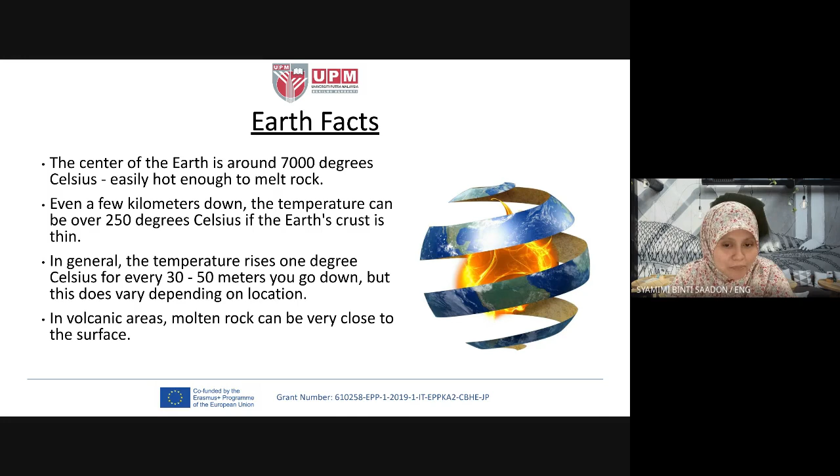So this is our Earth, which I mentioned just now; I think we have learned it since primary school. We have our atmosphere here, where we live, but inside the earth we have the mantle, outer core, inner core. So the center of the earth could reach around 7,000 degrees Celsius.

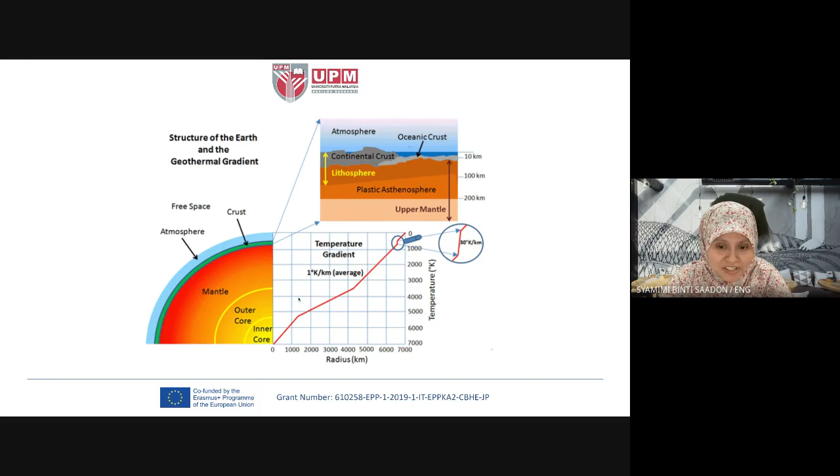Next, about geothermal energy: basically it's the heat generated from the earth's core, the mantle, the magma, the center part of the earth. It has been used for thousands of years in some countries for cooking and heating, a simple application as a source of heat for households. So it is simply power derived from the earth's internal heat. That internal thermal energy is the source of this renewable geothermal energy. This thermal energy is contained in the rock and fluids beneath the earth's crust.

So several miles below the surface we have this magma, and these underground reservoirs of steam and hot water can be tapped to generate electricity. So it has potential. Once we have a source of heat, there is a source of energy, so there is a possibility to convert this heat to generate electricity, to generate power, to heat and cool buildings directly.

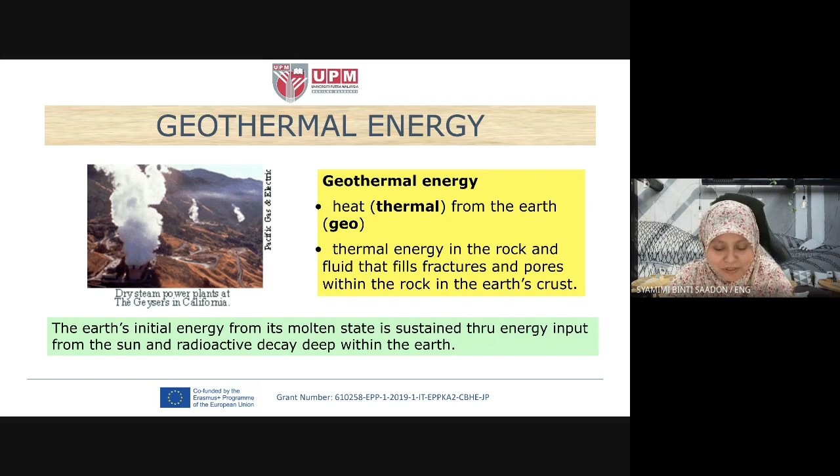Okay, still the master of all the heat is the sun. So this heat from the sun is sustained in our earth, and it develops this heat, this thermal energy from the earth. Okay, some of the geothermal resources, hydrothermal systems.

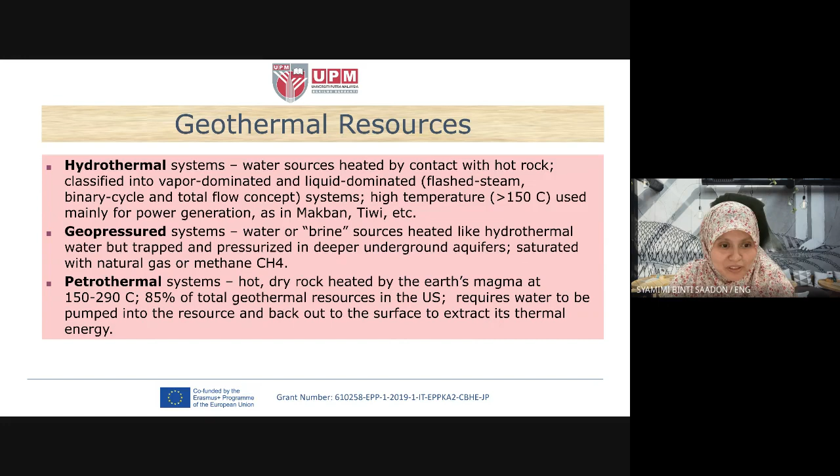This is some example. I think we skip this one first. Okay, I explain the other example first. Okay, geothermal electricity. So this geothermal electricity means that it is electricity generated from geothermal energy. Okay, so as I mentioned just now, we can use this geothermal heat source to produce electricity, to produce power.

Okay, so the heat continuously flowing from the core of the earth is estimated to be equivalent to 42,000 gigawatts. Okay, so if we apply this geothermal energy properly, geothermal could become a material contributor to global electricity generation. Okay.

Geothermal electricity generation is done by drilling wells, okay, macam telaga ke dalam tu kan, bawah tanah, to bring to the surface this superheated fluids or steam to drive turbine. So basically, how does this geothermal work?

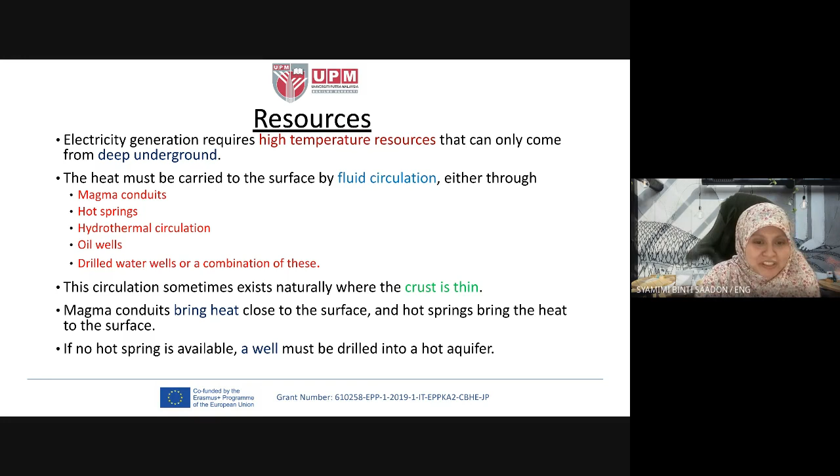So basically, the basic process mechanism of geothermal is still like any other basic thermodynamic process. Okay, most of you are from mechanical background, right? You mentioned to me in the first week. So basically, you know the thermodynamic cycle, the mechanical process behind any engine cycle. Okay, so we start.

So the first one, of course, we have the hot water from the underground, which has to be pumped through a well under high pressure. So this is one example: if we dig a well, like a tunnel downward, to drill and to pump the hot water from the underground. Okay, so it needs a high pressure to pump the hot water from the ground to the surface.

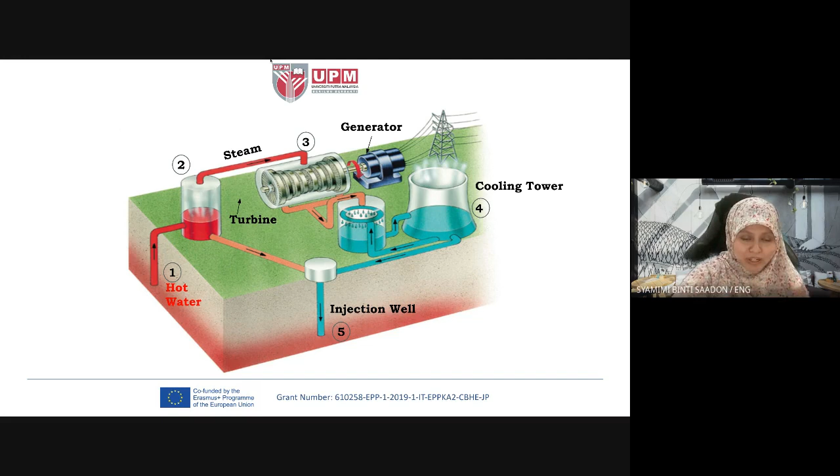The steam at hot temperature has internal energy, which is thermal energy, heat. So that thermal energy of the fluid is being converted to mechanical energy to rotate the turbine. So basically the process is an energy conversion process. We know from the first law that energy cannot be created and cannot be destroyed—energy can only be converted. So that is what happens in this thermodynamic cycle as well; we convert energy from one form to another.

So that is what it means: the steam, once at higher temperature, the fluid at higher temperature—we can imagine the speed of the molecules is higher. That kinetic energy of the gas, of the steam, is converted to mechanical power to rotate the turbine. Kinetic to mechanical power, mechanical energy.

Then the steam cools off in the cooling tower and condenses back to water. It's being cooled, exchanging heat in another heat exchanger, the cooling tower, through the condensation process. The cooling tower should have a lower temperature than the steam, the working fluid from the underground. Condensation occurs here, exchanging heat with the cooling tower, and the steam condenses back and becomes water again. The cool water is then pumped back into the earth, underground, and the process continues.

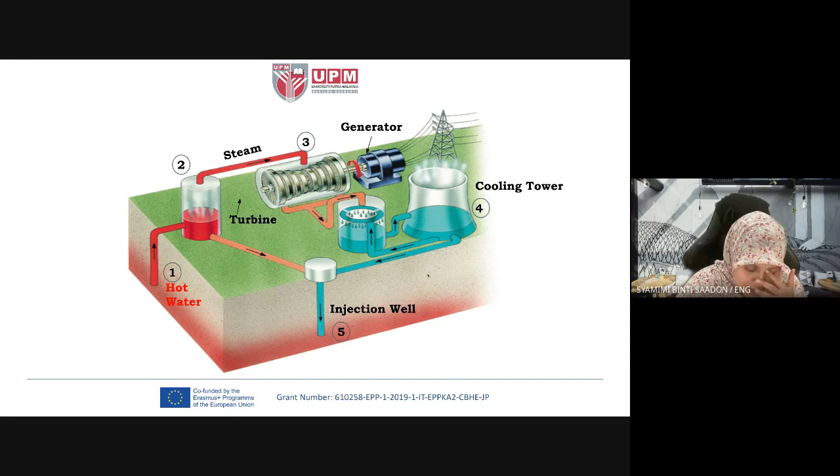So lastly, after condensation, the water is pumped and injected again into the well underground. So that is basically the process mechanism of geothermal, with only four main processes and components: pump or compressor, steam evaporator or boiler, turbine expansion, and condensation.

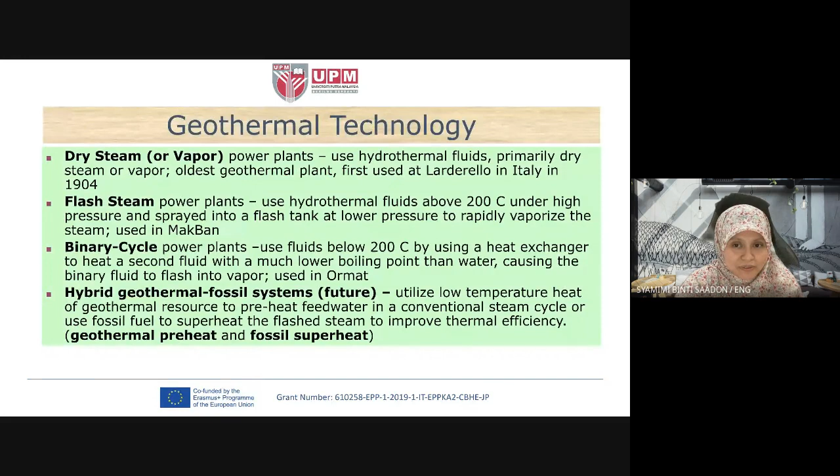So there exist four types of geothermal technology—actually three, as the last one is a future concept, future technology. The first one is dry steam, called dry steam power plants. This is the oldest, simplest, and first design of geothermal technology.

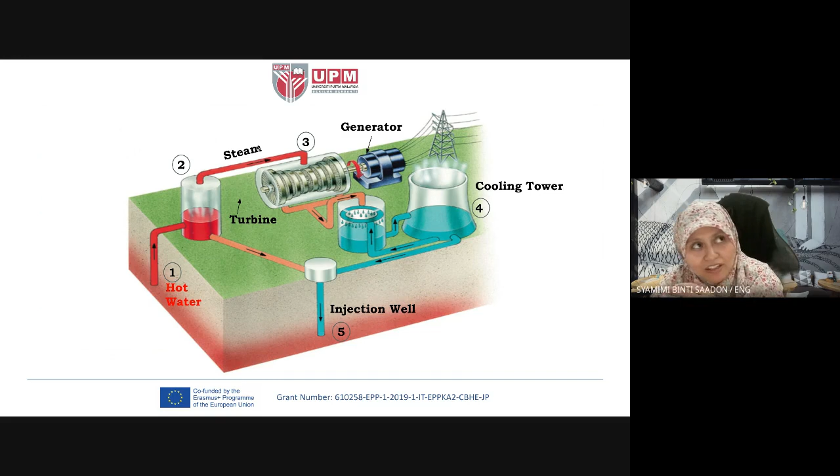It needs geothermal steam, the source of heat from underground, around 150 degrees Celsius or greater, to spin the turbine. So this means that looking back at the process, this steam, in the process from 2 to 3, has to reach a temperature of at least around 150 degrees Celsius or higher.

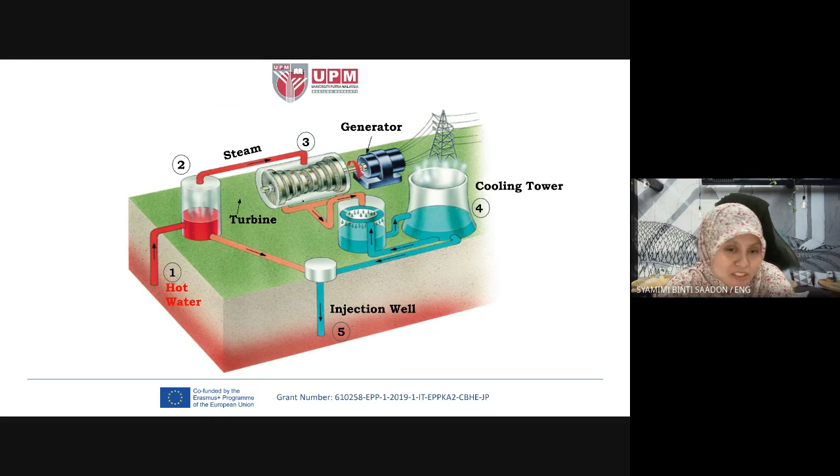Okay, so it has enough kinetic energy, enough heat, to move, to spin, to rotate the turbine and to produce power, of course.

The dry steam technology allows for the steam from a geothermal production well to be fed directly to a steam turbine, without a secondary heat exchanger.

So actually, for this first technology, it doesn't use any evaporator or boiler. It directs directly from the well, from the underground, the hot water, the steam being pumped and injected directly to the turbine.

So there's still, the steam still has to achieve the temperature just now around 150 degrees before it has enough energy to move the turbine, to spin the turbine.

But for this first technology, dry steam or vapor, it doesn't use an extra heat exchanger, which is evaporator just now, to evaporate the hot water to steam. So this one goes directly to the turbine, from the pump directly to the turbine.

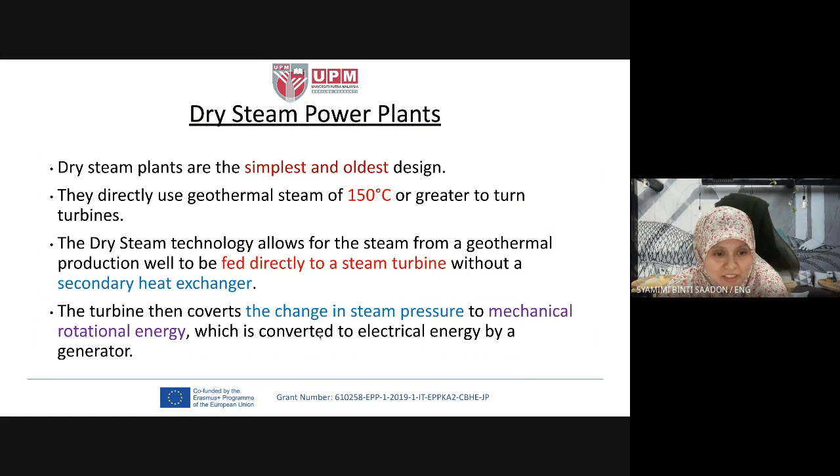The turbine then converts the change in steam pressure to mechanical rotational energy, which is converted to electrical energy by a generator. So this is the same process - the turbine produces mechanical rotational energy.

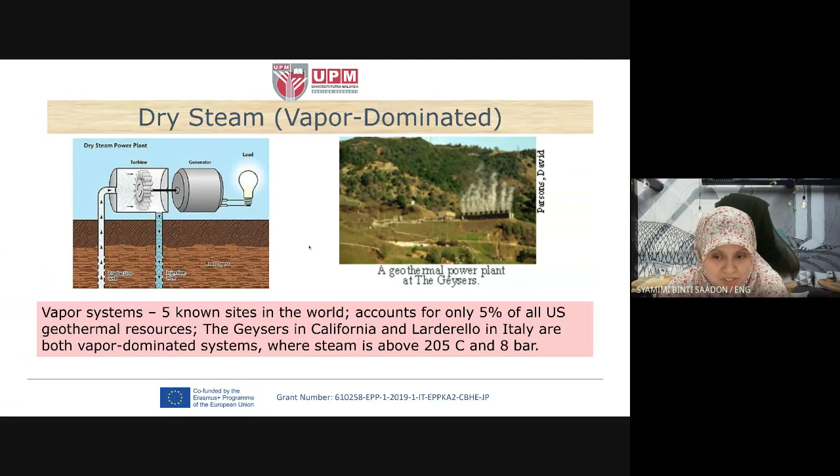And then this is the same graphic for the dry steam power plant. So here it doesn't have exactly the evaporator or boiler. Directly the steam - the dry steam - because the steam is already what we call dry, meaning it is already superheated, like a superheated fluid.

So it doesn't need an evaporation process. It can be directly, the temperature is enough to be directly injected to the turbine.

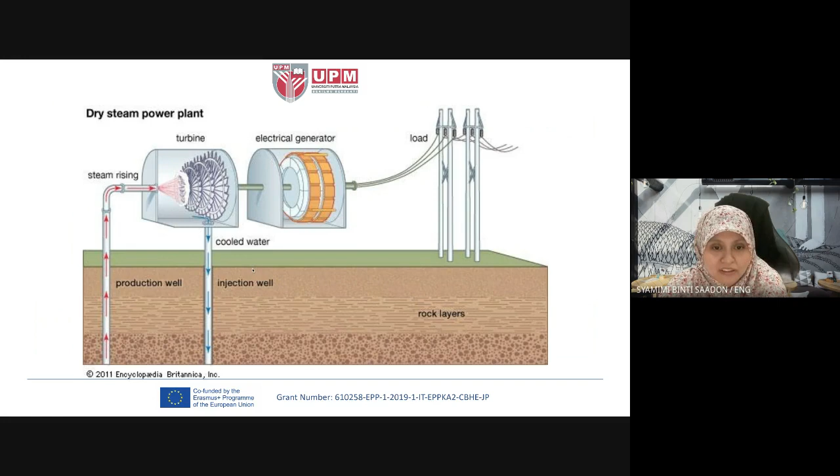So the water from the underground needs to first be boiled. Remember here the notation or concept that we use - for water it is always boiling, a boiler. Water, we say the fluid is being boiled, the boiling point.

But if the fluid is gas or steam, usually we use evaporator. The process is still the same, to increase the pressure and temperature of the fluid, the evaporation process, but the components are different. For water we use boiler, and for gas or steam, vapor, we use evaporator - the heat exchanger.

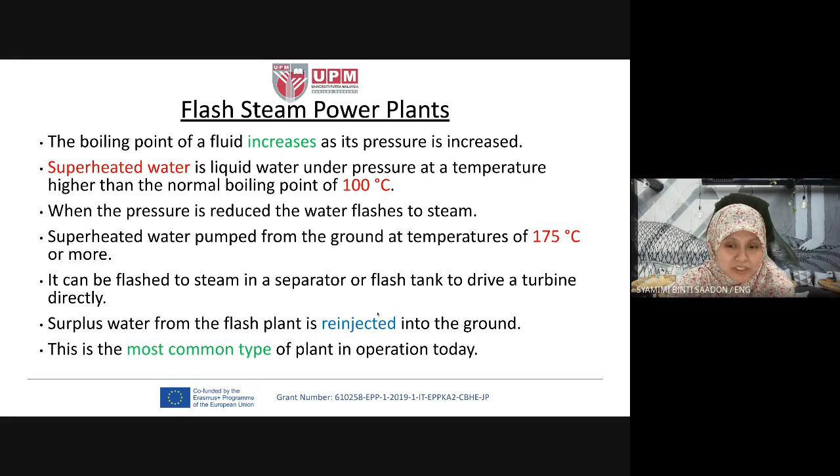So basically it is liquid dominated. Just now the dry steam was vapor. This one is liquid.

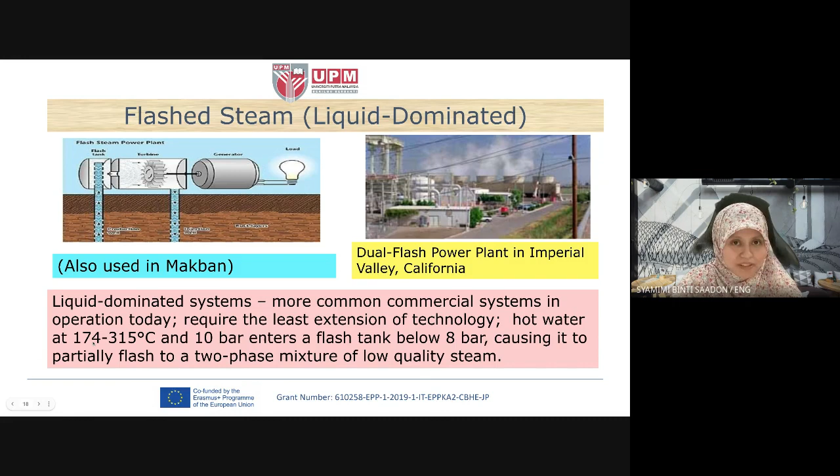So this is a liquid dominated system, the more common commercial system in operation today. It requires the least extension of technology. The hot water temperature is around 174 to 315 degrees Celsius and around 10 bar.

Okay, now the figures to explain the process used in this flash liquid or flash steam power plant. So we have a flash tank here, so it's actually like a heat exchanger.

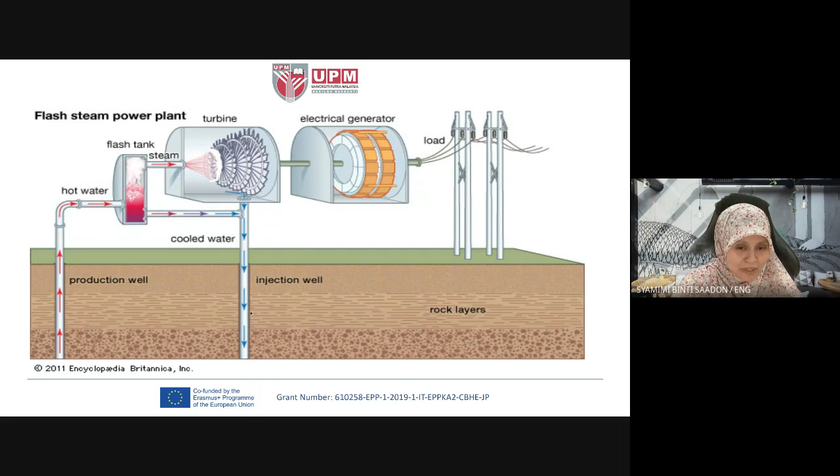The hot water from the well, from underground, is being pumped to this tank, and the higher temperature of the water becomes steam here. So this higher temperature steam will rotate, will spin the turbine, due to the kinetic energy. But the part that is not too hot, the extra, will be cooled down like condensation, and will be injected back into the underground well. So that is a flash steam power plant.

And then the third one, we have binary cycle power plants or combined cycle power plants. Binary means two, combined two. Cycle power plants are the most recent development and can accept fluid temperature as low as 57 degrees Celsius. So usually the more recent technology or development can be used for heat sources with lower temperature. So it is an advantage.

It is an advantage when we have a power plant cycle technology that can produce power from low heat. Let me explain in simple terms: usually a technology needs a high temperature before it can convert to power or electricity. Usually that's how it is. The working fluid, the steam, must be at a certain minimum high temperature before it can spin the turbine, meaning it has enough kinetic energy.

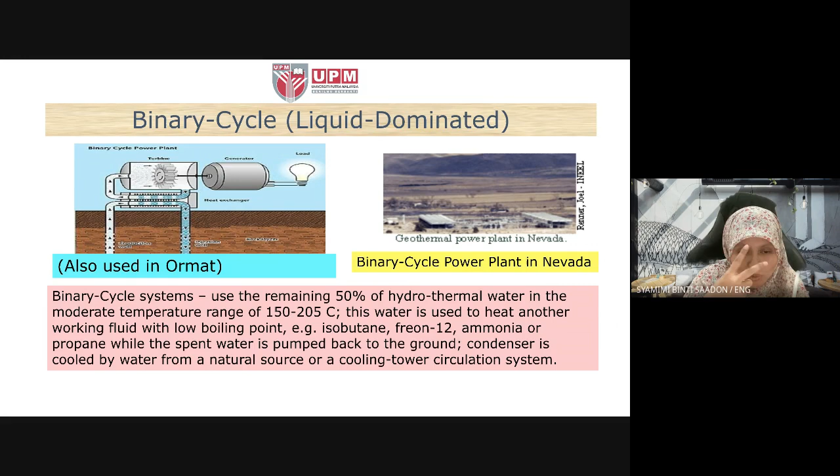So if the difference of the temperature gradient in the heat exchanger is higher, it means that extra heat is needed to boil, to evaporate. But if the temperature gradient between those two fluids within the heat exchanger is less, different dia lagi kecil, means that less heat is needed untuk evaporate tu.

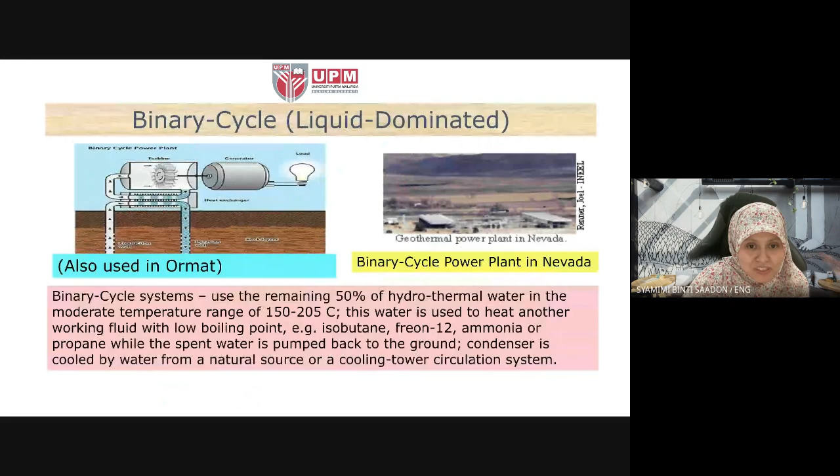Okay, because if you remember the general definition for efficiency, the ratio of what is being produced to what is being given as input. So the input tu yang datang daripada heat exchanger ni, proses tu.

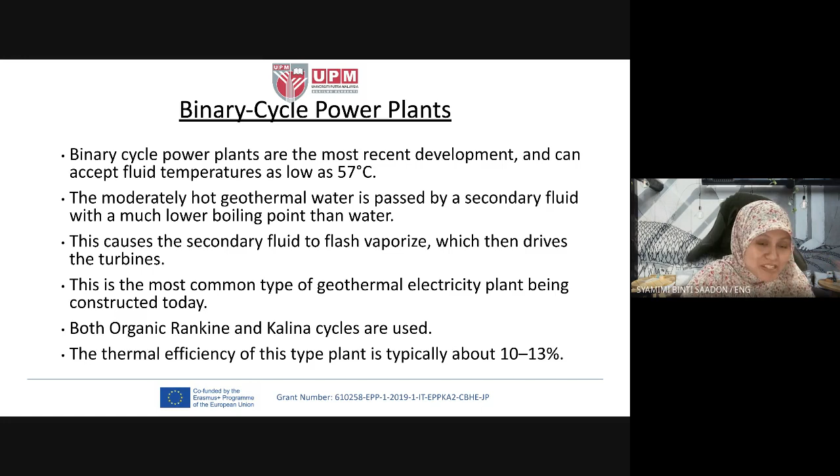Okay, so this binary again, binary cycle power plant.

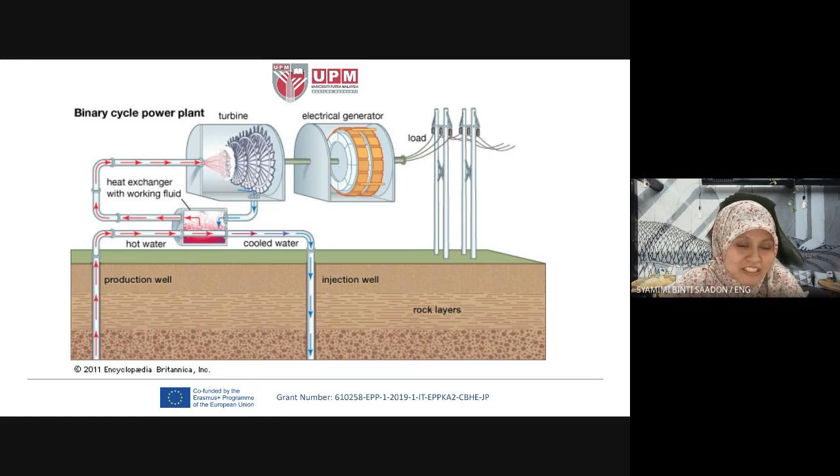Okay, and I think this is the fourth one and the last example of technology for geothermal. Enhanced geothermal system: in ground that is hot but dry or where water pressure is inadequate, injected fluid can stimulate production. Okay, kita tengok. So this one is still in current development. This approach is called hot dry rock geothermal energy.

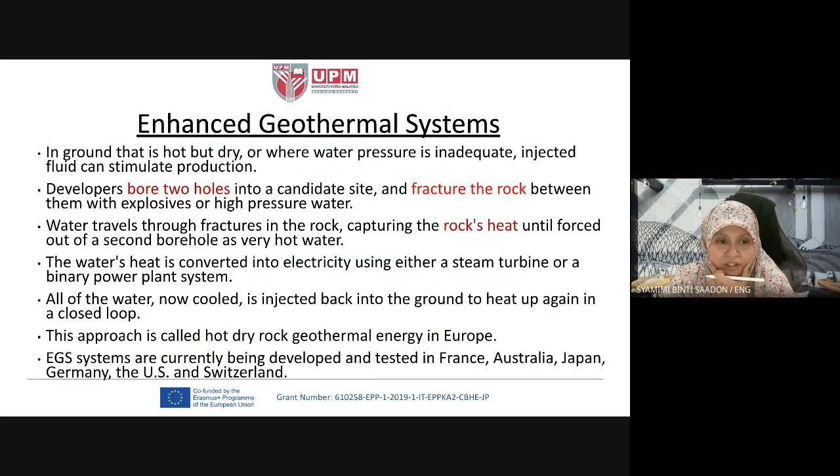Developers bore 2 holes into a candidate site and fracture the rock between them with explosives or high pressure water. So water travels through fractures in the rock, capturing the rock's heat until forced out of a second borehole as very hot water. The water's heat is converted into electricity using either a steam turbine or a binary power plant system. So in the end it's the same as the earlier one, just that it uses fracture, like there's rock down here.

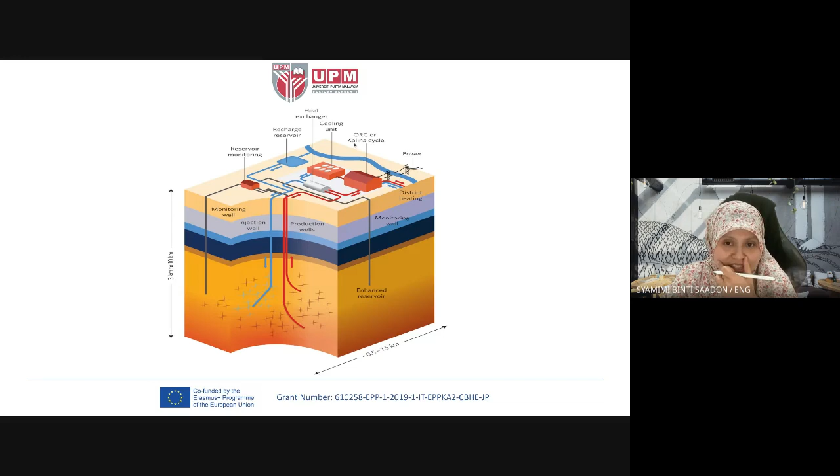Okay. So this one is still currently being developed, and it's used also with a secondary binary cycle, which is ORC or Kalina cycle. Okay, so this future geothermal technology, hybrid geothermal fossil fuel system, utilizes the low temperature heat of a geothermal source in the low end of a conventional cycle and the high temperature heat.

Okay, so geothermal, the concept is like the regenerator in a cycle. Remember, it means that it uses the extra heat from the high temperature level or source and uses it to preheat the lower temperature source. So geothermal preheat uses geothermal heat to preheat to its saturation point the feed water of a conventional fossil fuel plant. No steam is bled from the LP turbine to preheat the water, thus increasing power output.

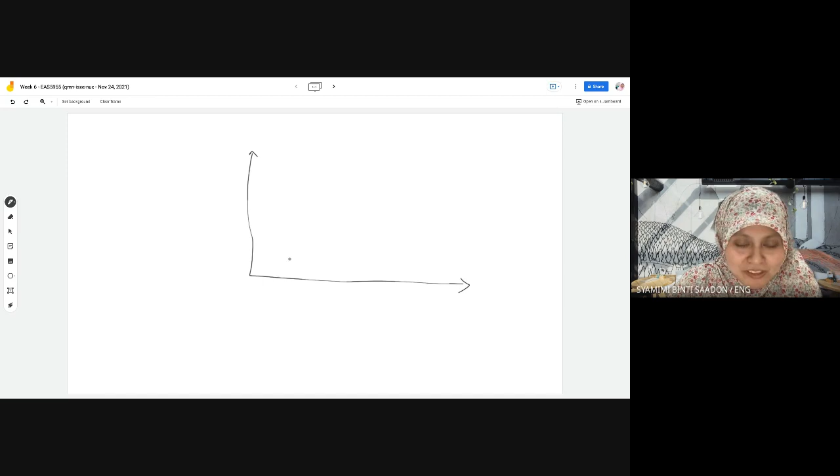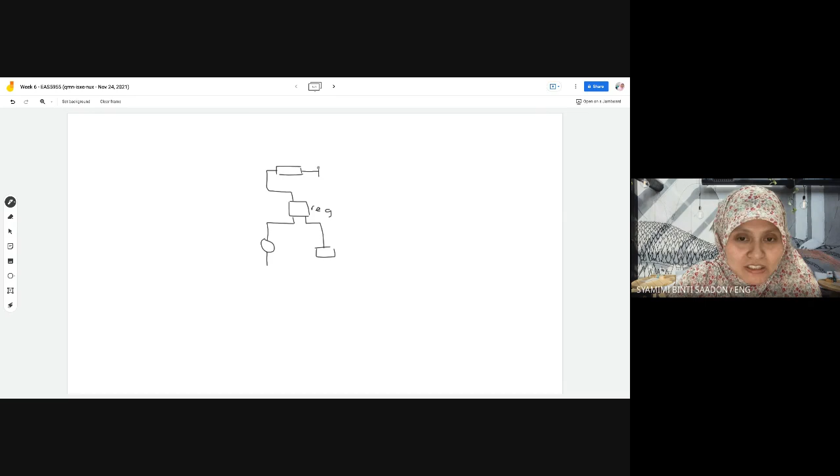So this is the pump. Then here we have a regenerator. And then here the condenser. This is the regenerator. And then this one is the same basic evaporator. And then we have a turbine. Right? Okay, this part is the basic. I just want to show this regenerator. Okay, this is the evaporator, this is the condenser, this is the pump.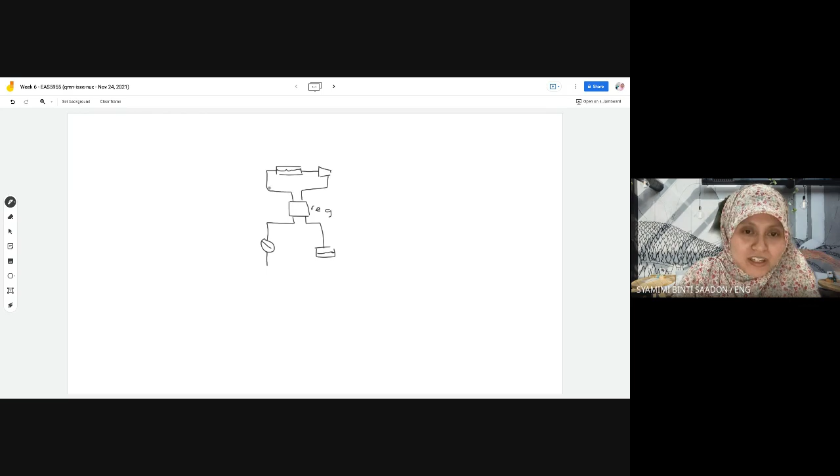So regenerator, we use the heat from the higher temperature stage to preheat the fluid from the lower side, the colder side here, because usually the pump and condenser side has lower temperature and lower pressure. This side is a higher temperature level.

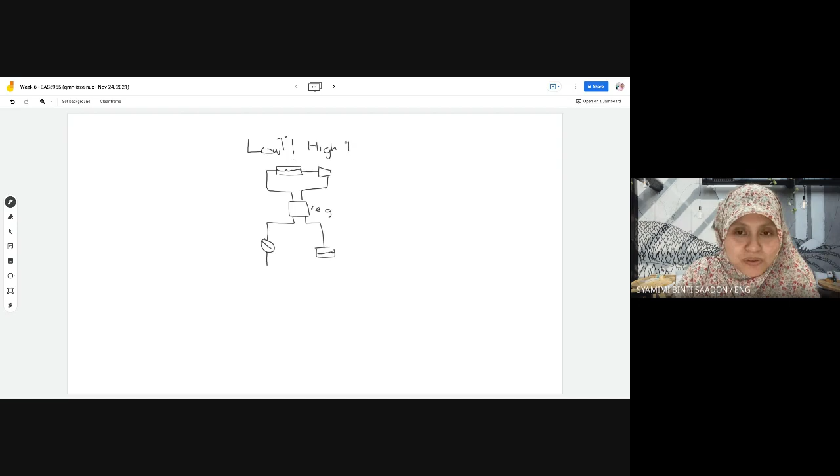Okay, so basically the idea is to minimize the heat source or the fuel, so we use this regeneration concept. It means that we regenerate the heat from the higher temperature source, the same fluid, just that we regenerate the heat to preheat the colder, lower temperature part. That's why there's regeneration here. Otherwise there'd be nothing here. So the concept is roughly like the regenerator. Okay, geothermal preheat, to preheat.

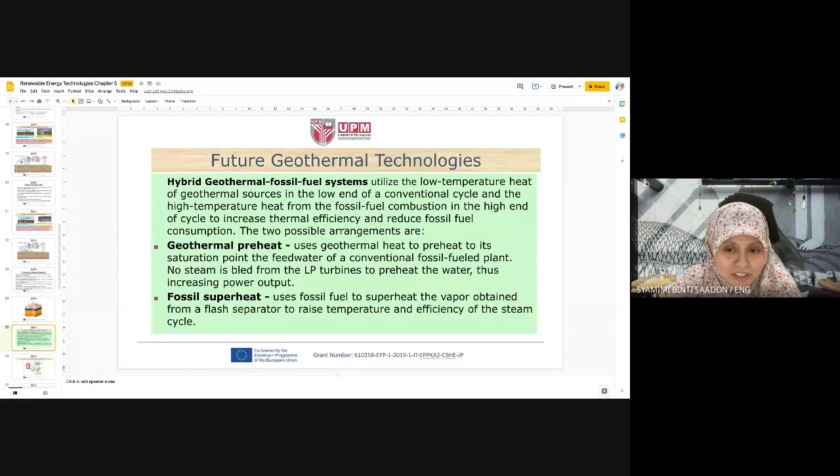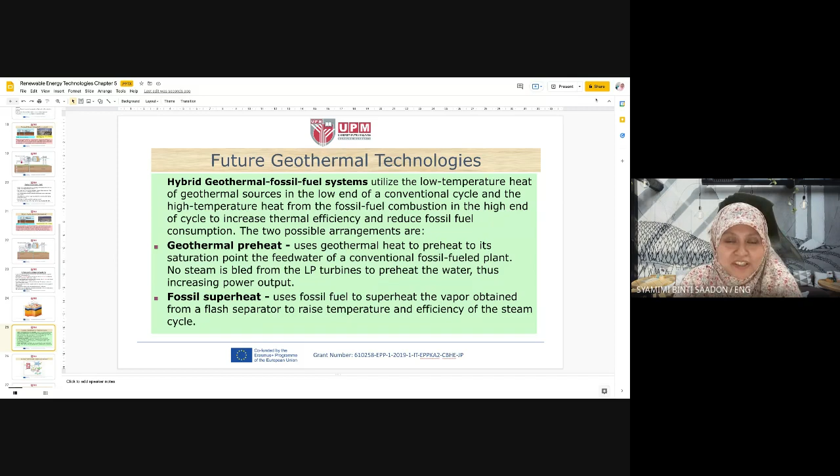And then fossil superheat, another one is the use of fossil fuel to superheat the vapor obtained from the flash separator to raise temperature and efficiency of the steam cycle. So another one is to reheat to increase the temperature of the vapor. Even after evaporation, we superheat, increase the temperature more, because higher temperature means higher thermal and kinetic energy. So thus it will produce extra power in the turbine. So the concept is roughly like that.

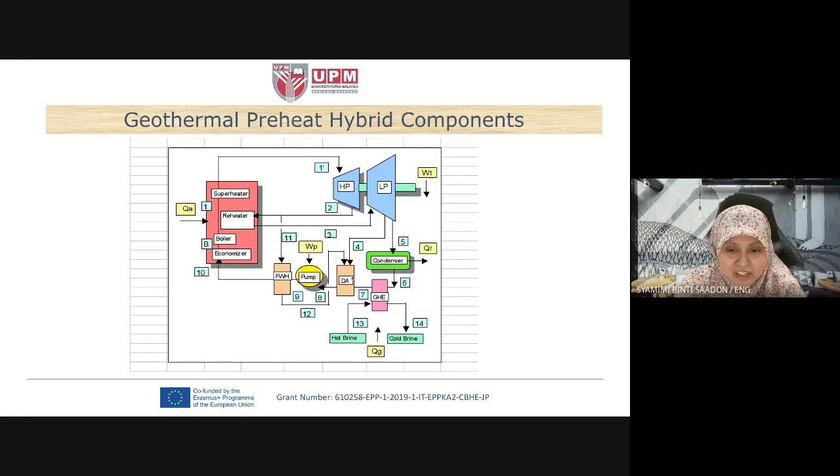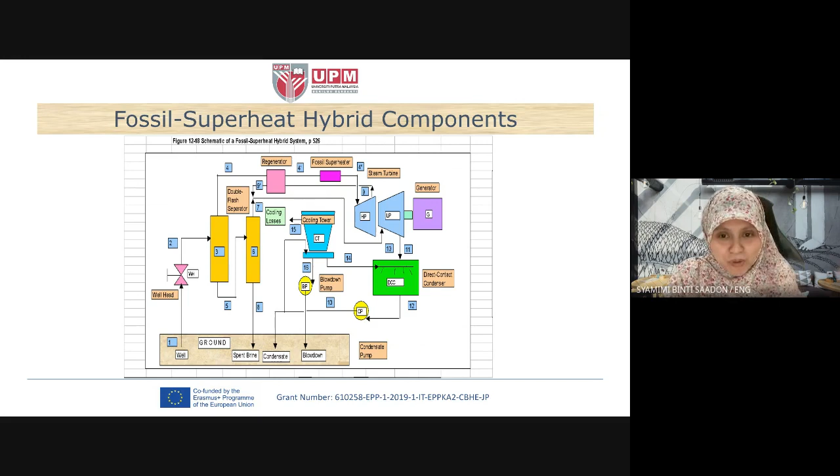Okay, so this is the diagram. It looks a bit complicated, but the main process: where's the pump? Okay, pump, there's feed water here. Feed water, pump, and then the basic one only has an evaporator, or boiler. But here with this preheat concept, it adds an extra economizer, or sometimes we call it regenerator, and an extra superheater, etc. So just extra heat exchangers, to increase efficiency, of course. And another one, fossil superheat. Of course the process becomes more complicated. Okay, enough about the technology.

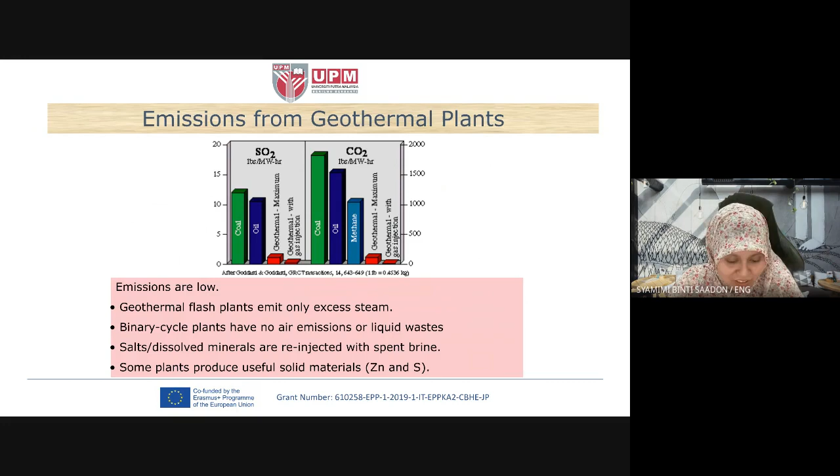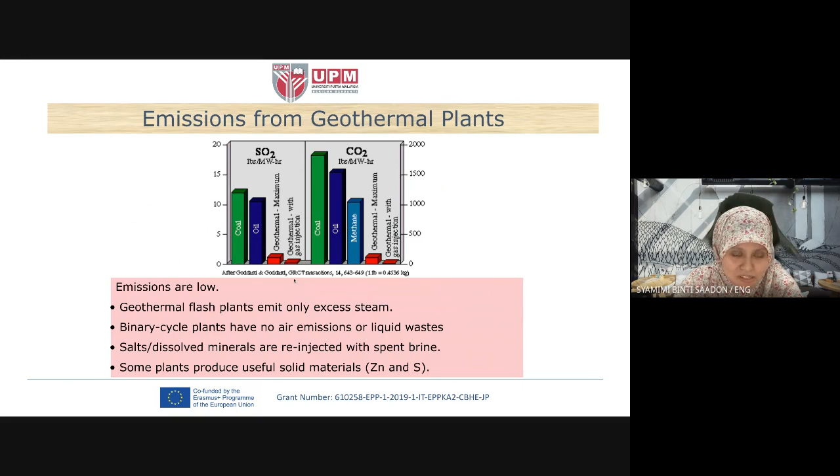Now the emissions. Compared to other renewable energy, the emissions resulting from this geothermal source are quite low. It still emits some gas, but it has less production emission of carbon dioxide or sulfur.

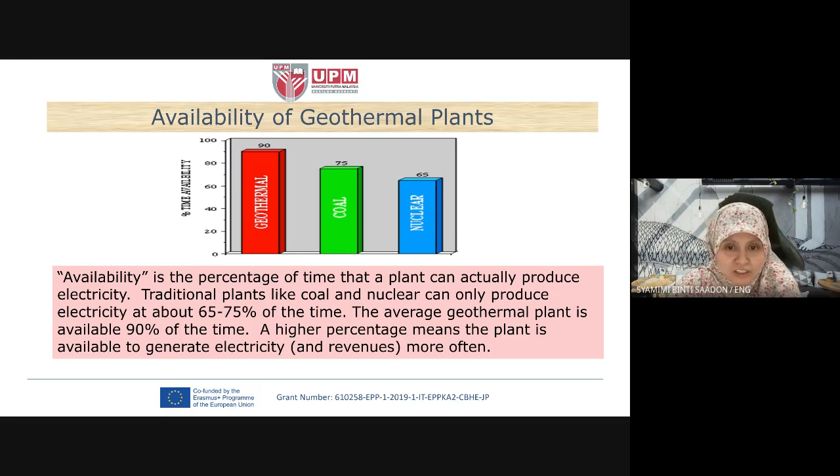But here for geothermal, availability is the percentage. Traditional plants like coal and nuclear can only produce electricity about 65 to 75% of the time. However, for a geothermal plant, the availability is around 90% of the time. A high percentage means the plant is available to generate electricity more often. So the percentage availability of geothermal is higher than conventional sources like coal, nuclear, etc. So what are some of the benefits, and later on we'll see the disadvantages of geothermal.

Sustainability: geothermal power is considered to be sustainable because the heat extraction is small compared with the earth's heat content. The earth has lots of heat content, so the geothermal power that we use is only a small portion of our earth's heat content. It is considered sustainable because the source is always there.

And then the emission intensity is low compared to other renewable energy. It is available throughout the year, unlike solar or wind energy. It's also relatively inexpensive, saving from direct use. This depends, of course, on the location and on the installation process, the cost.

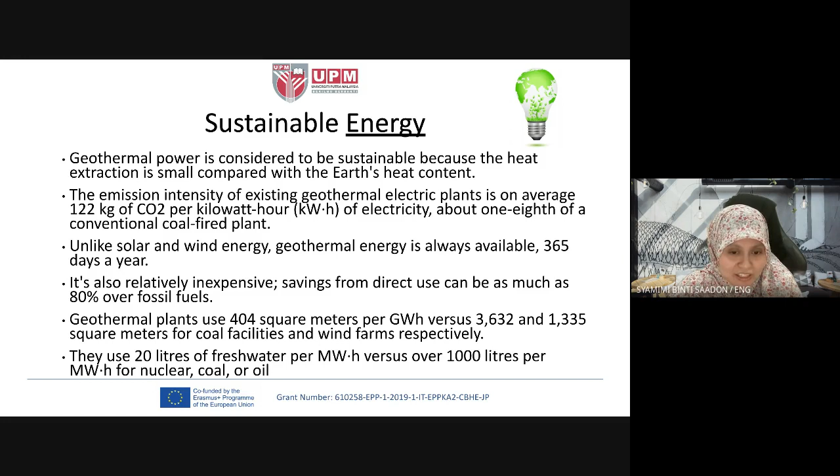Geothermal plants use 404 square meters. The area needed to install this geothermal plant is maybe less than other energy sources. Another advantage: it does not produce any pollution and does not contribute to the greenhouse effect. It does not take up much room, and no fuel is needed. Okay, sorry.

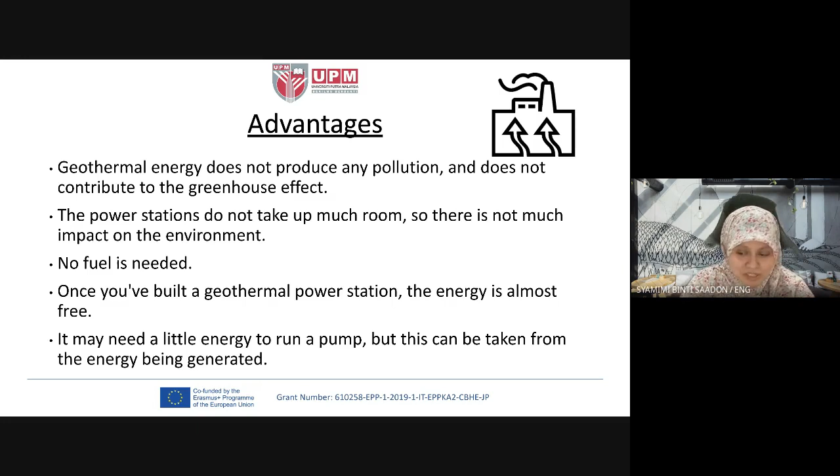The energy is almost free. It may need a little energy to run the pump, but this can be taken from the energy being generated. The pump process still needs a little energy. And then other benefits: clean, renewable, etc.

However, the big disadvantage is that there are not many places where you can build a geothermal power station. So not every location is possible. Later we'll see how Malaysia is.

Hot rocks of a suitable type at a depth where we can drill down to them. Because we need to drill down underground to collect the heat from the earth, it must be of a type that we can easily drill through.

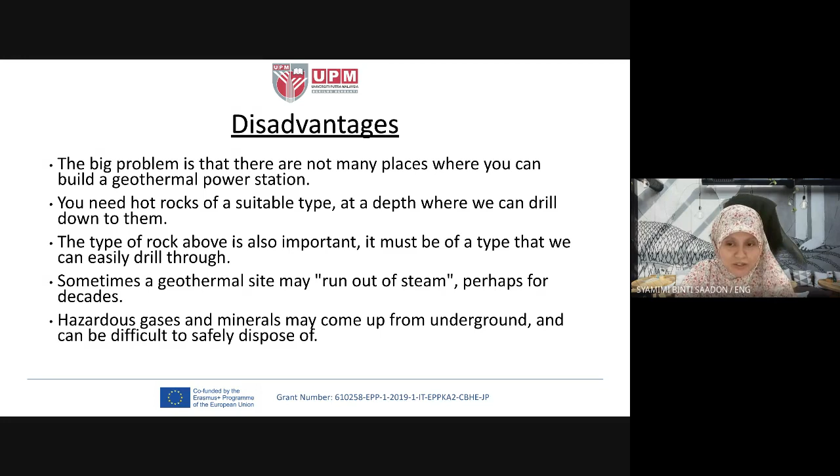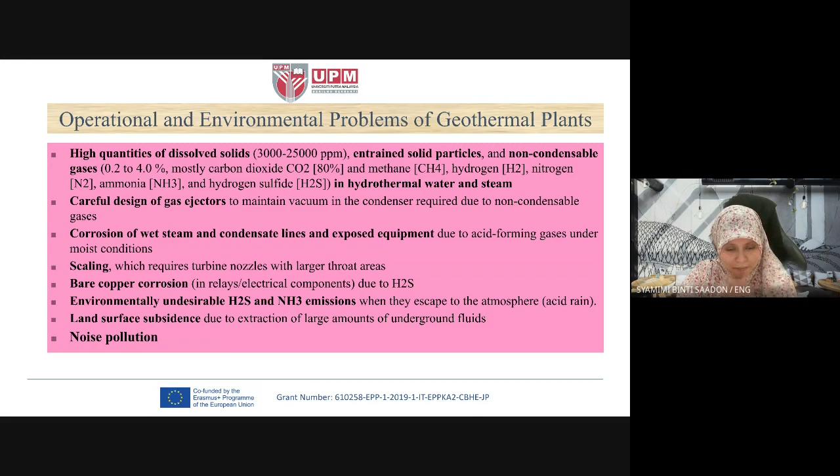And then hazardous gas emissions may come up from underground and can be difficult to safely dispose of. Even though it has less emission of carbon dioxide, sulfur, etc., it still has some hazardous gas that can come up from underground. Those are examples of the gas. And then corrosion, noise pollution, undesirable H2S and NH3 emissions, etc. The rest you can read.

Doctor, may I ask one question before you break? Actually, where is the suitable location to find the source of the hot water for geothermal energy?